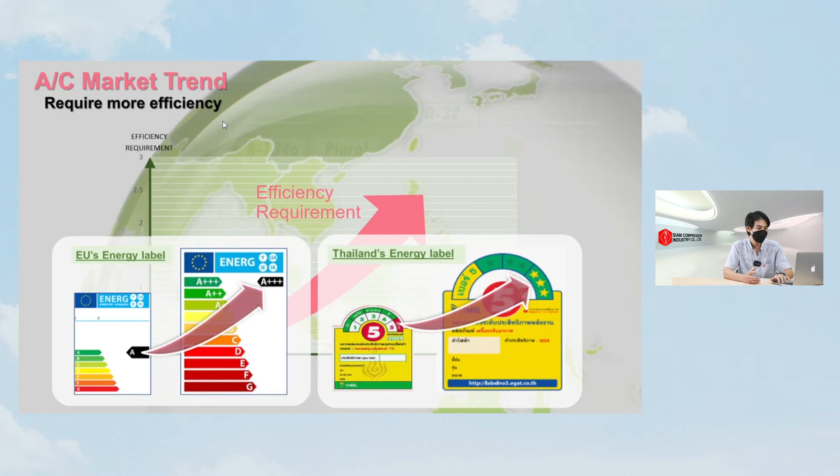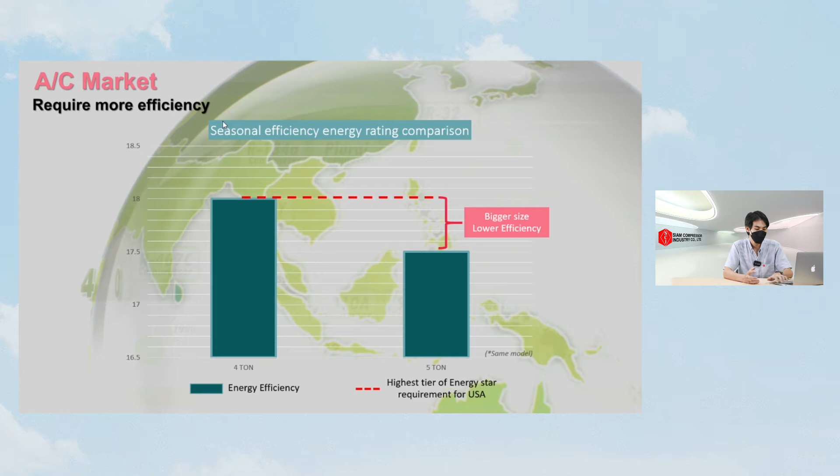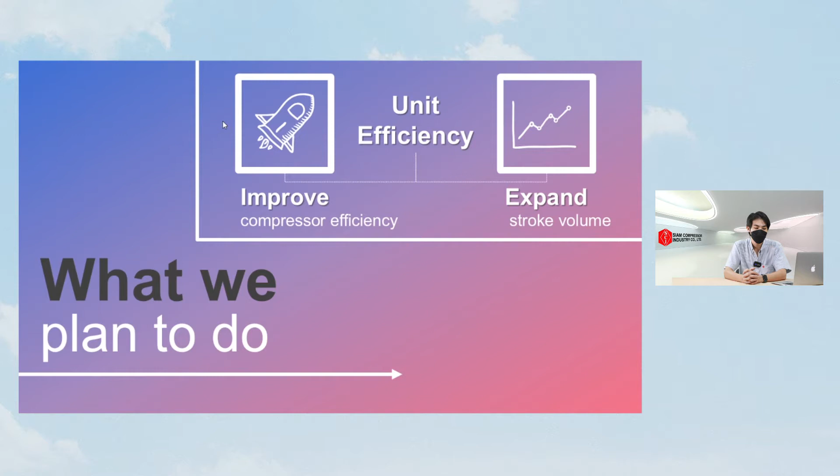Normally, as the capacity size goes bigger, the efficiency will be lower. This is why we developed the new Twin Rotary technology to serve this application. There are two main focuses we are working on right now: improving compressor efficiency and expanding stroke volume.

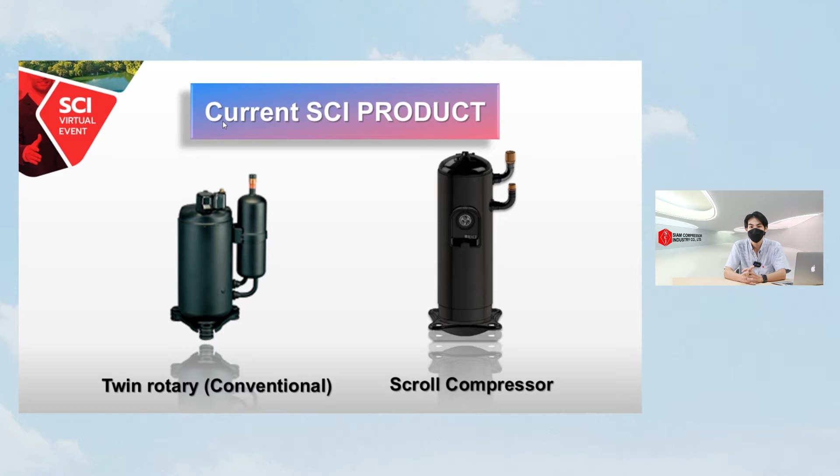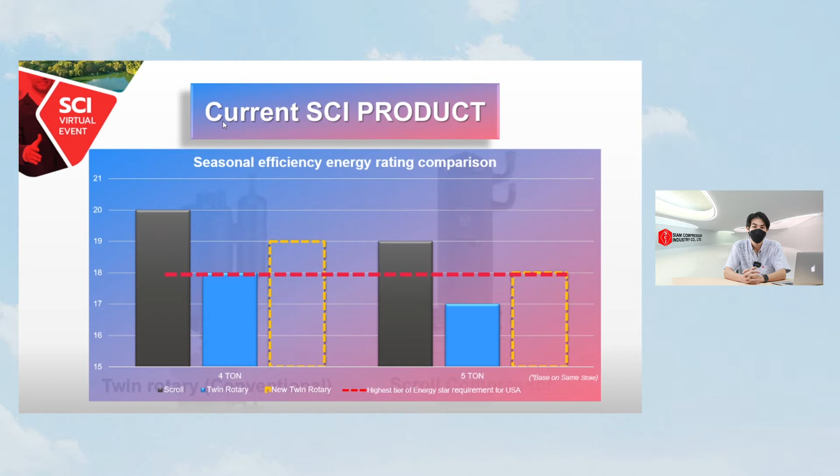If you have the question of why we do not offer scroll compressor to match 5 tons of refrigerant - it's true that scroll compressor has higher efficiency than twin rotary, but it comes with higher cost as well. So we are trying to offer a better solution, which is high efficiency and lower cost in the twin rotary compressor.

To improve the efficiency, we developed a new motor design giving us 3% more efficiency. We also designed a new suction muffler to receive a bigger size of liquid refrigerant, and it also requires more oil charge amount, so we increased the oil charge amount by 60% by increasing the height of the bottom shell of the compressor.

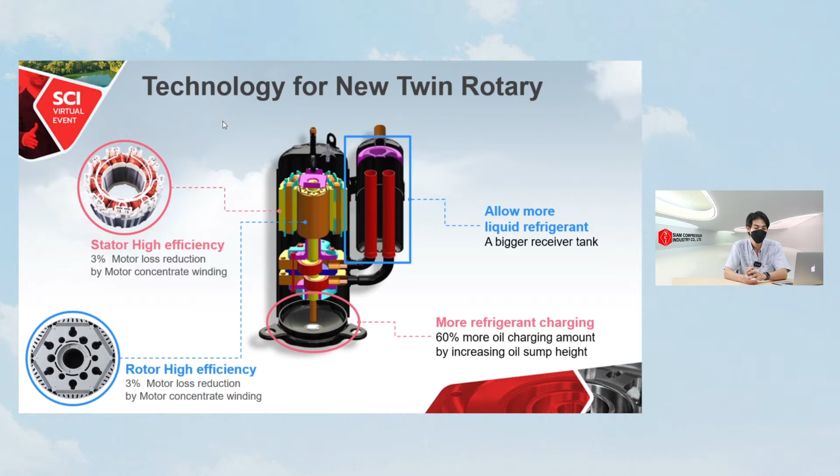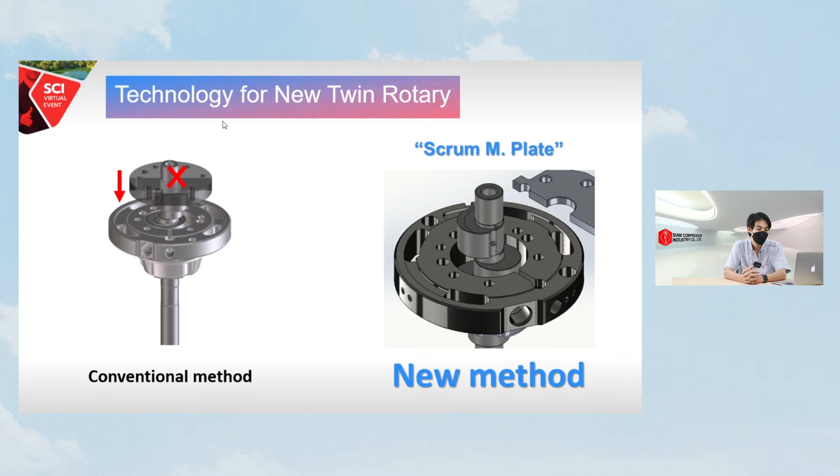We also have new technology for the twin rotary called the Scrum M. Plate mechanism part. Normally when we try to increase stroke volume, we reduce the height of the compression chamber and the rolling piston becomes smaller. By the way, we implemented a new method by assembling it into 2 parts and assembling it together from both sides instead, so we can get more efficiency.

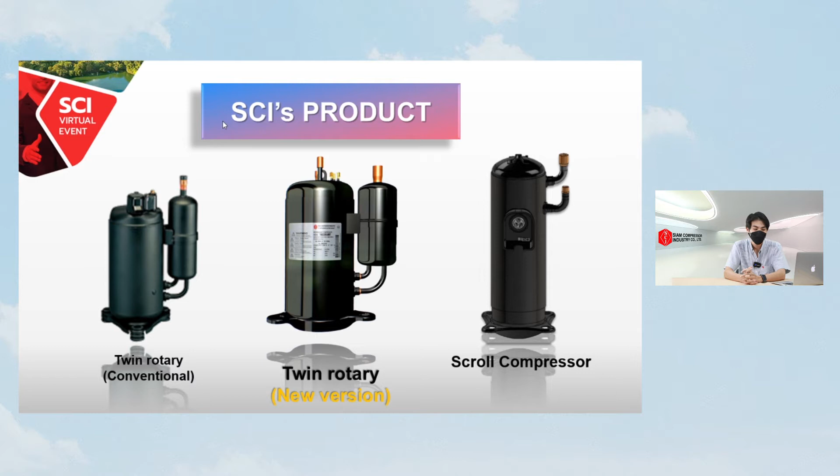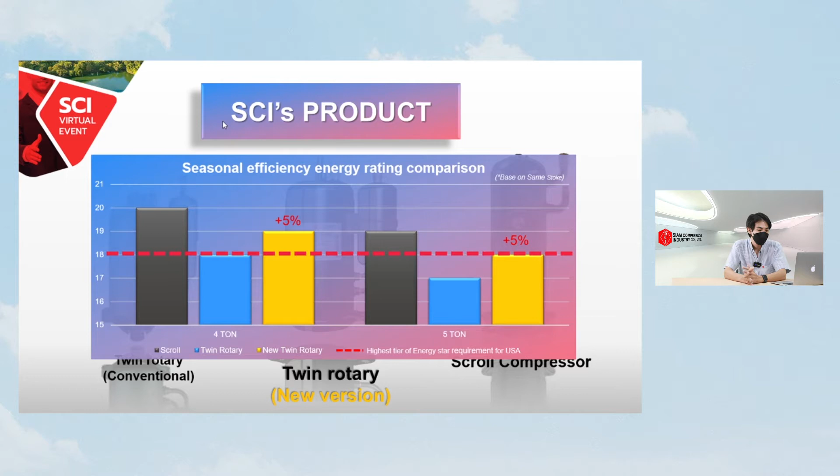Now let's see when the improvements come all together. You can see in this picture, our new twin rotary as the yellow column can now reach the highest tier in 5 tons of capacity and even go beyond that in 4 tons of capacity. The thing here is the cost - we can reduce 30% compared with the scroll compressor.

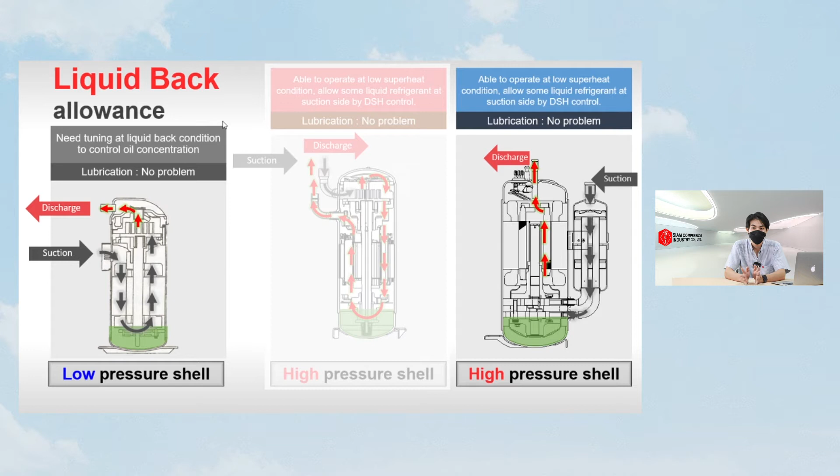Moreover, our products also have a very useful function, which is liquid back allowance. Since air conditioner applications might be installed with very long pipes of refrigerant, it requires a lot of refrigerant charge. For low pressure shell compressors, they cannot allow liquid refrigerant intake to the compression chamber. But for our compressor, since we are a high pressure shell compressor, it allows some portion of liquid intake to the compression chamber, and the liquid refrigerant would be evaporated immediately since we have high temperature inside.

We also have a lubrication issue consideration. Low pressure shell will be limited to a minimum speed limit during use, since it cannot supply oil when the speed is very low. To fix this problem, you need to boost up speed to maintain oil supply. But for high pressure shell compressor, due to the centrifugal force oil supply method, it can operate at minimum speed as long as it operates within the envelope.

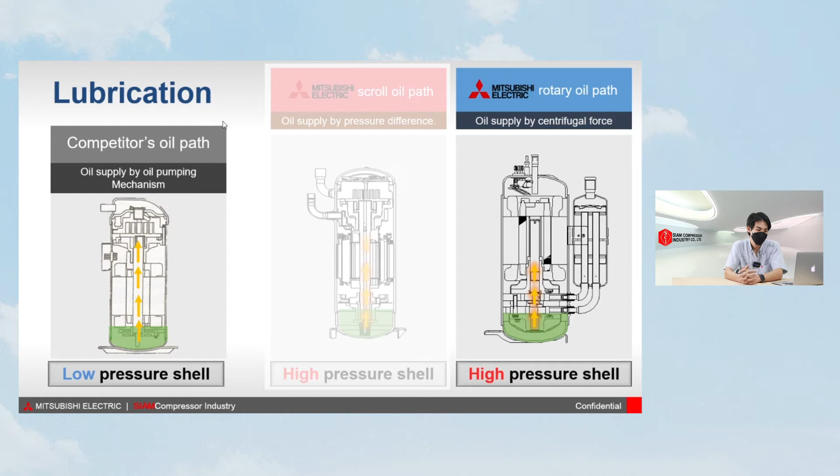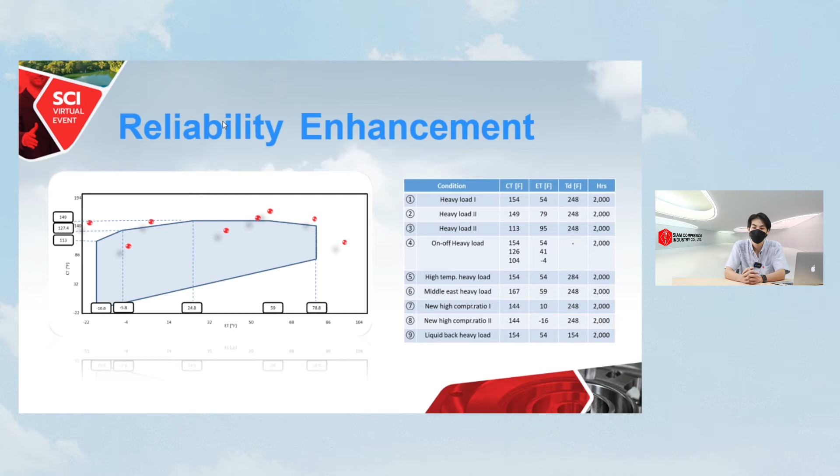From everything I said, we can get a bigger operating range of the twin rotary model when compared with other scroll compressors from competitors. This gives you more flexibility and reliability to run your unit in various ambient temperatures.

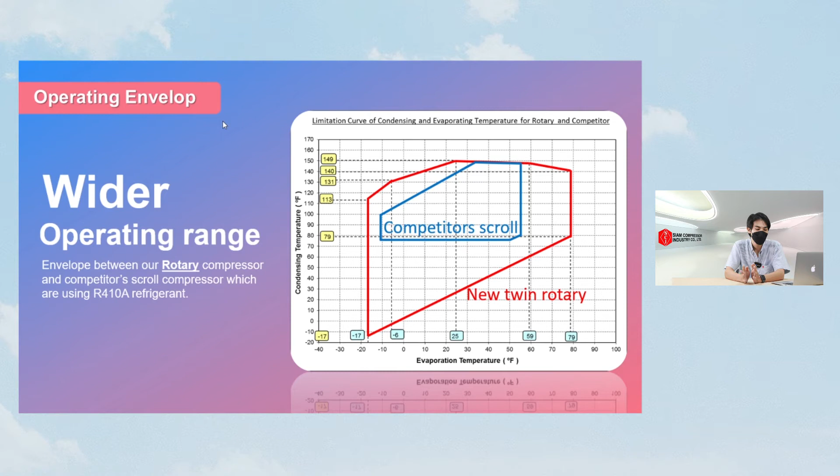Another way to improve efficiency is to expand stroke volume, as I mentioned in the very first page. If you are interested in our twin rotary compressor, we now have it available for R32 and R410A refrigerant with 2 models: small chassis S series and bigger chassis T series, from around 1 ton of capacity up to 3 tons of capacity. For new models, we are developing up to 5 tons of capacity.

The sample would be available by 2022, but for mass production it would be around 2023. We are also developing an alternative refrigerant, R454B. Now the sample of this model is available, but for mass production it would be in 2022.

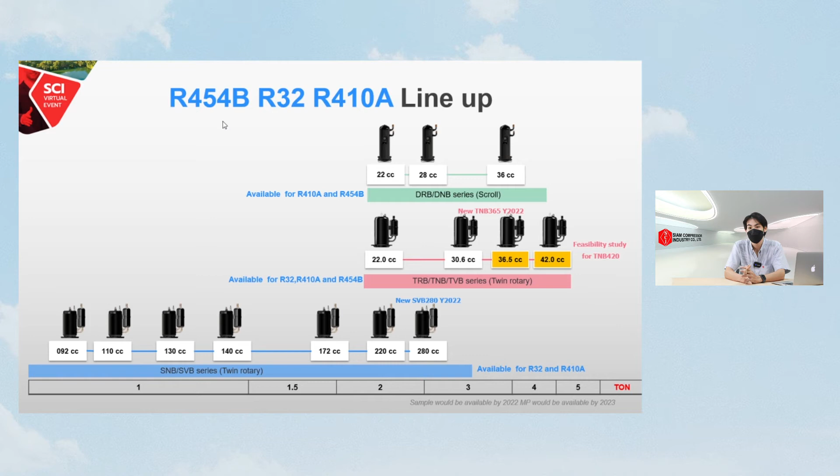Alright, thank you so much for your attention.